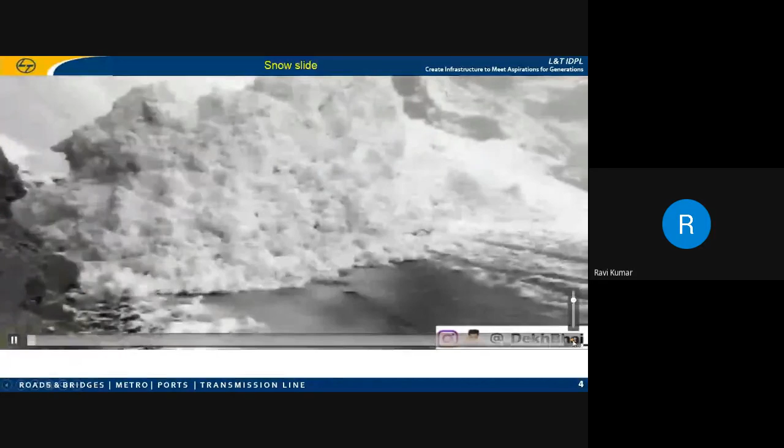My dear friends, suppose if my project corridor moves along the snowfall mountains, I have to be prepared myself. Suppose after completing your graduation, if you are given an opportunity as a site in-charge of a highway which passes through the snowfall mountains, you should be in a position to overcome these disasters. This is related to a natural disaster, snowfall slide.

So you have to prepare yourself, you have to plan in a year what will be the duration of heavy snowfall, medium snowfall, and very low snowfall where there will not be any snowfall. That calendar has to be prepared, and you have to get in touch with the National Disaster Management Office or the nearby climatic government offices and get clear data on, in the present calendar year, what may be the expected maximum snowfall.

Accordingly you have to prepare yourself and keep your team ready, whether the disaster quantum may be small or big. That doesn't matter, your preparation is the matter. So you have to well prepare yourself. Your team has to be well prepared, ready, and mobilized. When such type of things happen, immediately your team has to be mobilized and clear all the snowfall sliding and make the road open for vehicle movement. There should not be any break point.

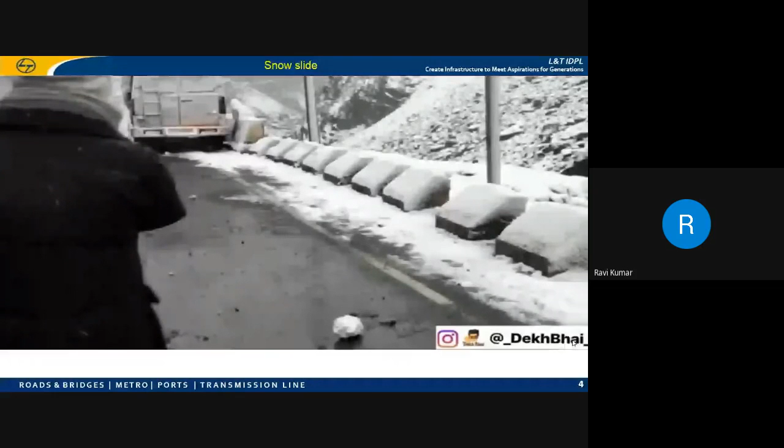If a situation arises where the natural disaster like snow slide or rockfall is very severe, taking more quantum of time for clearing the debris, in such a situation you should also find alternative routes where you can divert the traffic, so that there is always a continuity of movement of vehicles from one place to another, carrying food materials related to hospital products, medicines. Therefore, the project highway should always be in a functional situation. That is a major target.

Suppose if my project corridor is undergoing a period of 100 years, such a heavy quantum of rainfall hasn't taken place. For example, 2 days back you might have seen in the news that Hyderabad is receiving a huge quantum of rainfall, 20 centimeters overnight, where there is heavy flood everywhere, the vehicles are being washed away in the flood, the people are being washed away in the flood, the buildings have collapsed because of the heavy quantum of rainfall.

My dear friends, you have to prepare yourself. There cannot be any reason to come out that this project corridor is closed because of this problem, that it will take 2 days, 3 days, 4 days time to reopen. That situation should never occur.

We are having presently 15 highway projects spread across India, where every location will undergo, in a particular year, the overtopping of highway, heavy water flow in the rivers, landslide, rockfall, everything will happen. But we have our own protocols, our own formats, a separate team under the leadership of the project manager of the respective projects. They will lead the team. We have a separate operation manager, separate maintenance manager, separate manager who will take care of this type of disasters.

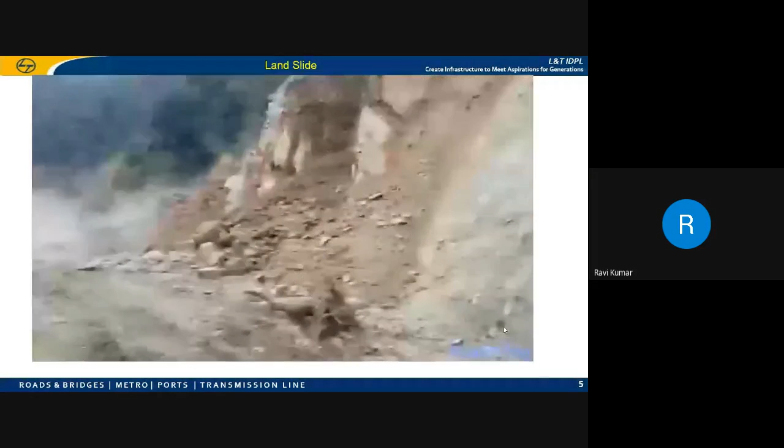You might have all seen in the newspapers or news channels about landsliding. First of all, we have to understand what is landslide. Landslide, or you can call it mudslide, refers to the downward movement of rocks, soil, mud, and organic debris. Areas with a steep slope, for example mountainous regions, are particularly susceptible to landslide hazards.

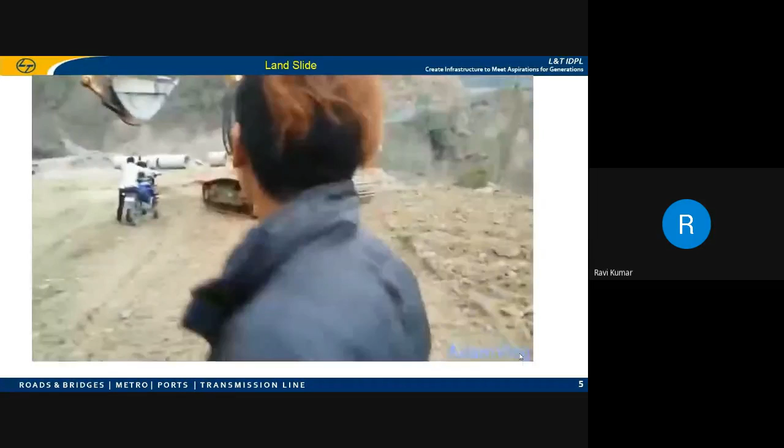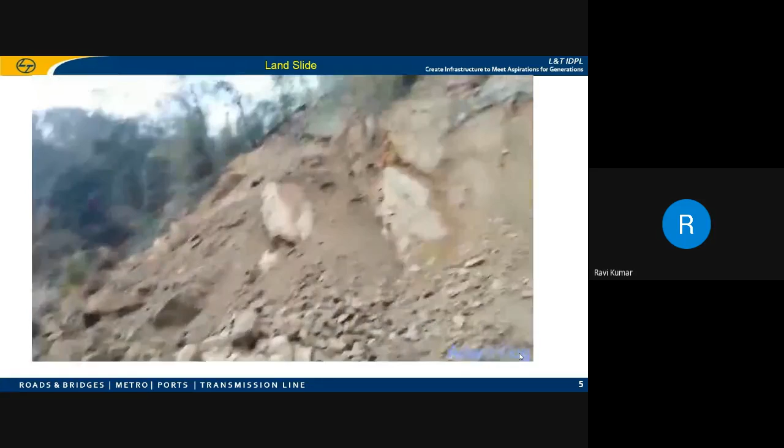Water can trigger landslides and mudslides because it alters the pressure within the slope, which leads to slope instability. Other factors that weaken slope materials also contribute to the occurrence of landslide. These factors include both natural events such as geological weathering and erosion, and also human related activities such as deforestation and changes made to the flow of groundwater.

Landslides are classified according to the type of material that falls and how that material moved downslope. For example, there are rockfall, mudslides, and debris flow.

So now we have seen what is disaster, what is mitigation. We have seen snowfall, sliding, landsliding. Now we have understood what is landsliding, how it will occur. Now we will see what is disaster management.

Now we will see another video showing rockfall sliding, which you might have also seen in the news.

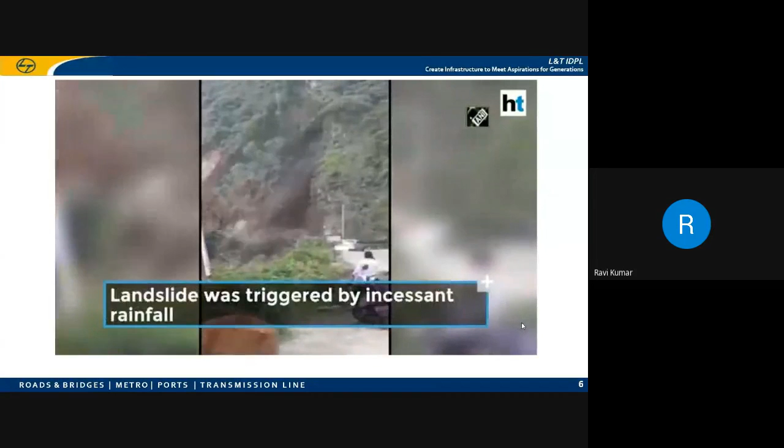As I said, incessant rainfall, heavy rainfall. So water is the greatest enemy in causing the landsliding or rockfall sliding.

So my dear friends, now we will see what is the objective of disaster management plan. And before seeing it, I just want to explain what is disaster management. Probably nowadays, disaster management becomes a part of a curriculum either in the undergraduate or in the postgraduate.

So disaster management does not avert or eliminate the threats. Instead, it focuses on creating plans to decrease the effect of disaster. Failure to create a plan could lead to damage to assets, human mortality, and lost revenue.

Events covered by disaster management include acts of human caused disaster like electrical fire, structural issues, industrial sabotage, and natural disasters like earthquake, tsunami, flood, hurricanes, etc.

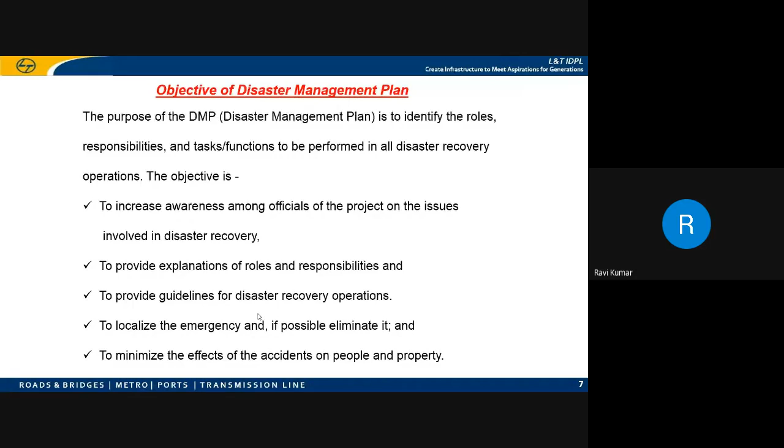So elimination will require prompt action by operators and works emergency staff using, for example, firefighting equipment, emergency due to collision and submergence, etc. Minimizing the effects may include rescue, first aid, evacuation, rehabilitation, giving information promptly to people living nearby.

My dear friends, all this whatever we are discussing today is available in the books in your library. Go and search the library related to this disaster management and mitigation plan. More and more methods, latest techniques, mitigation plans, everything are well defined with pictorial representation. Go spend more time in this pandemic period, spend more time in e-books.

Go get a membership in e-library, keep on reading more books, keep on revising your previous subjects, create a group among your friends and discuss technical points, share your understanding with your friends and ask your friend to share his understanding, and collaborate on all these things. Discuss with your faculty members, get a clear understanding of why for, what for, how for, when for. In civil engineering, if you are able to find a solution for all these questions, my dear friends, then you can easily move forward. You can keep moving irrespective of any situation that comes in your life.

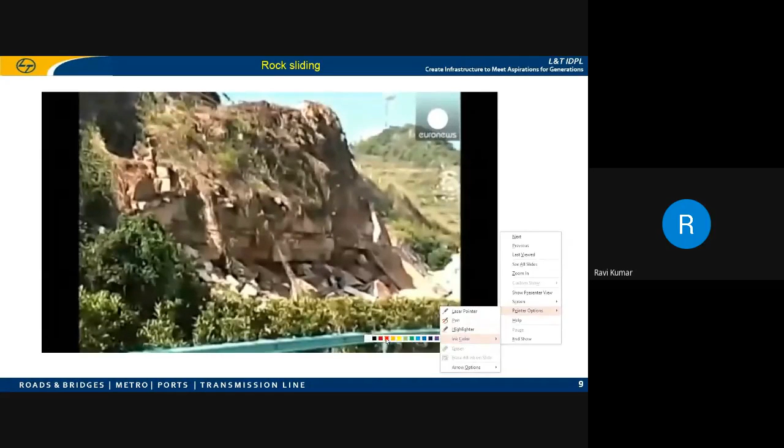You can see there is a huge rock mass here. At the bottom, a metal beam crash barrier. This is the metal beam crash barrier, and now you are having a lateral clearance. But this huge land mass is going to slide down. That is rock sliding. Let's see how it is happening.

Watch closely. So the rock mass hits over the metal beam crash barrier. That is a barrier protecting the vehicles. You see how much quantum of rock mass falls over the highway. You see a big mass is falling.

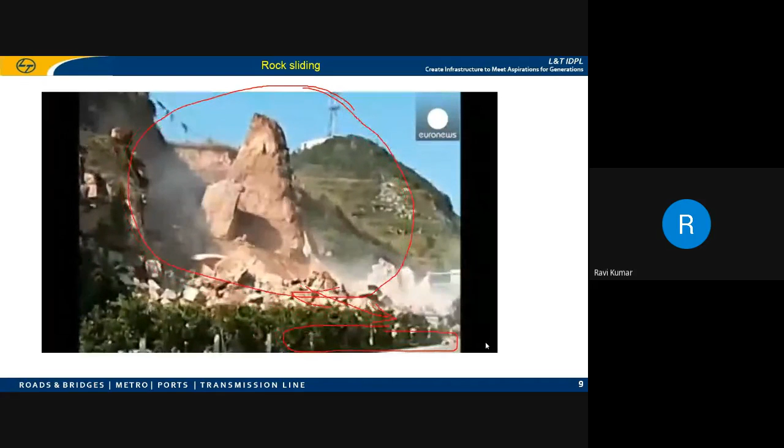Now we will see another video related to earthquake, natural disaster.

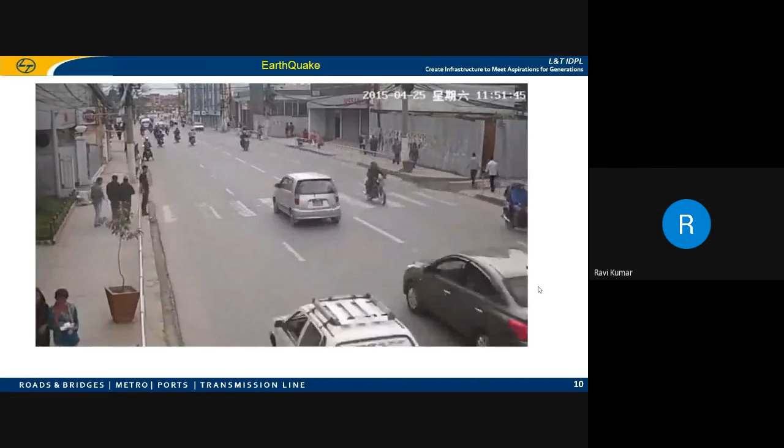See now what is going to happen. See now every vehicle is slowing down. People are crossing. See, by using mobile phone, they are used to cross. Even in our day-to-day life, we are able to see this even today. That should be avoided. Your safety is in your hand.

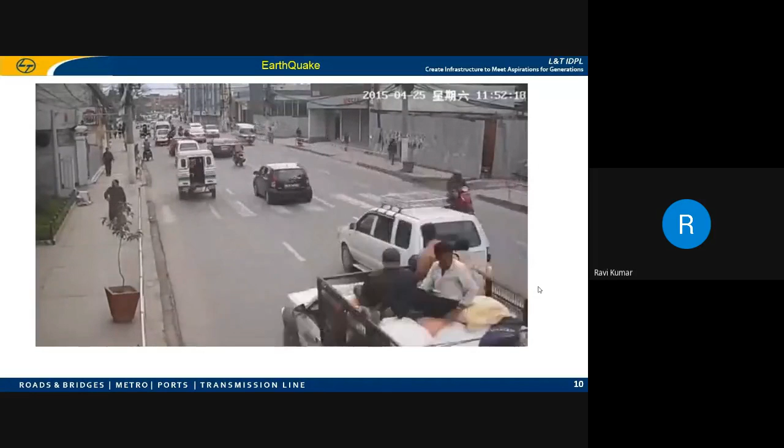See now, see the plant. And see everybody, see the lateral movement, how the trees are shaking, the plants. See the Omni van, how it is shaking.

So now because of this lateral ground movement, there may be some disturbances to the highways in the form of crack development in the longitudinal direction, that is parallel to the traffic movement. There may be impact towards the structures. That is why when you are involved in the design of highway structures, you have to understand the environmental condition, whether it is moderate, severe, or very severe, extreme. Then what type of earthquake zone it is, seismic zone 2, 3, 4, 5, and what is the maximum wind velocity at that particular location.

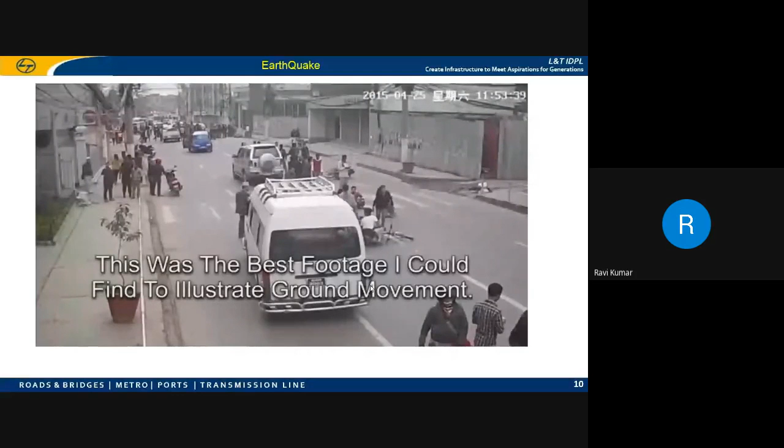Now let's see another video in understanding soil erosion.

Sir, the video audio is audible, sir.

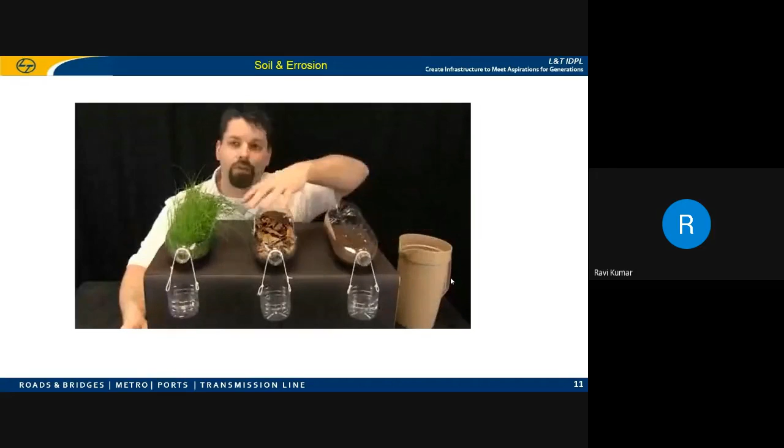Now when the water is poured over it, you will understand the erosion. This is a typical explanation with reference to how the erosion will take place.

So when you pour water in each bottle at the top, it will wash the soil. Since the water keeps moving from top to down, it will carry the soil particles along with it. It will wash away.

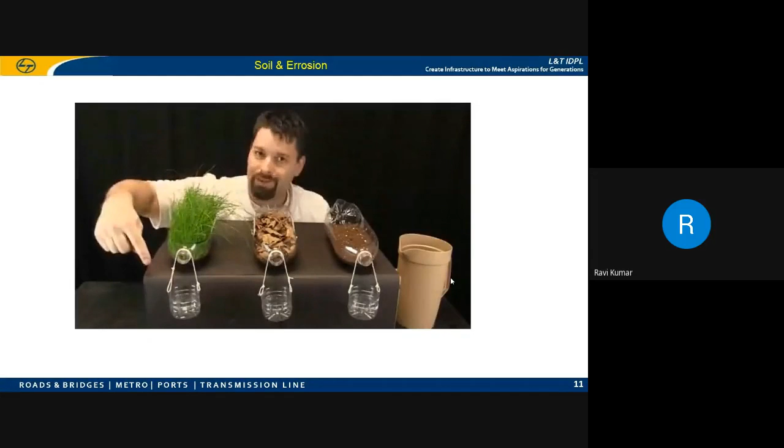Now in the second case, if the same quantum of water is poured, we will see the difference between the first bottle without anything, the second bottle with the dry leaf, and the third bottle with grass growth or vegetation growth. You see?

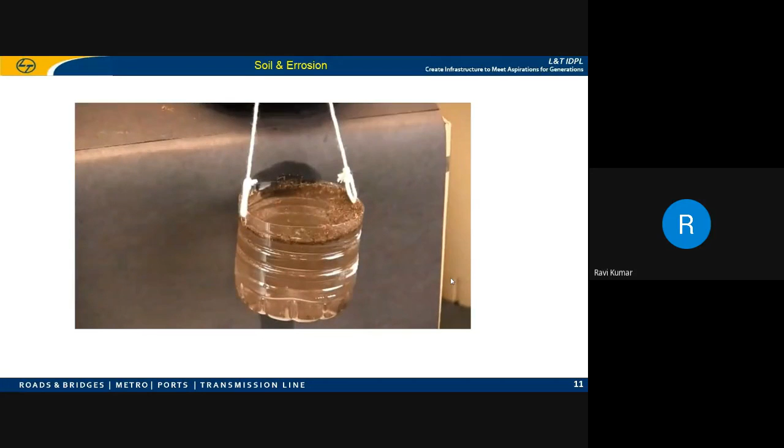You can see the soil particles or dust particles are washed away and deposited into the collective container. So in this way, the scour or erosion will take place in water bodies where your structure is located.

So now you have to protect your structure against soil erosion. That is why whenever you are involved in the design of structures across water bodies, the river bed, 5 meters in the downstream and 3 meters in the upstream, will be protected by means of floor protection work, that is bed protection. The river bed will be protected using rigid aprons and flexible aprons.

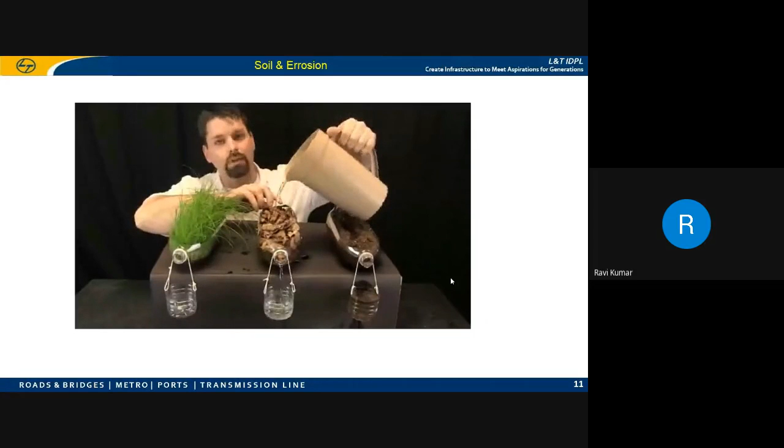Now water is being poured onto the second container, where dry leaves have been put. Now you are able to see the difference between the first with only dry soil and the second with the dry leaf. You can see the quantum of dust eroded from the container is very less compared to the first one.

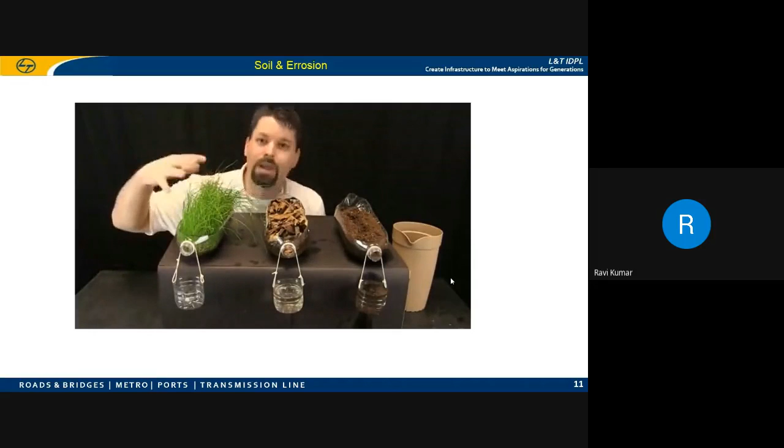So these dead leaves or dry leaves kept over the soil are acting like a barrier that protects the soil underneath from washing away along with the water flow.

Now the third, it is something a small experimental study video. Now you see, you can see the difference. The last container, where the grass roots are there, is clean when compared to the other two.

Now, what is the difference? Which makes the difference? Let us see by zooming in what is actually happening in the soil where the vegetation is grown. You can see now he is just removing that, where the grass has grown and the soil.

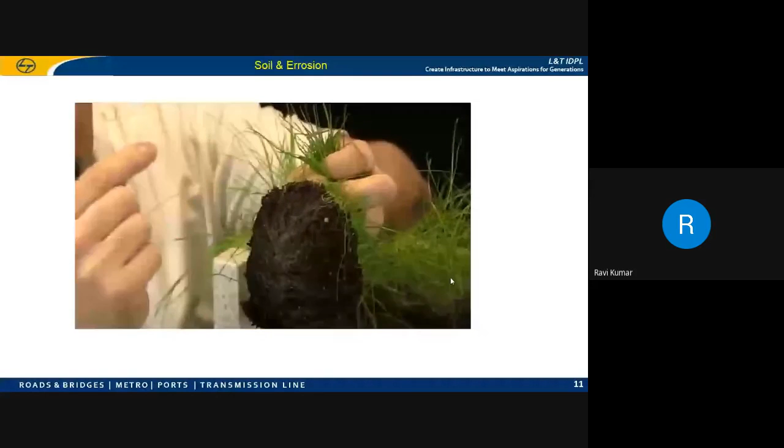So what you are able to understand from this is the roots of the grass are holding the soil underneath. It is holding firmly in such a way that when the water moves downwards, the roots of the vegetation or grass don't allow the soil particles to wash away.

You see, when he squeezes, only water is coming. So the roots are storing the water.

That's why, my dear friends, in a highway, the embankment on either side of the highway will be protected to avoid rain cut or erosion by means of stone pitching, or by means of turfing, or by means of geocells. So in that way, soil stabilization is being carried out.

Even in floor protection, due to the water flow from upstream to downstream at high velocity, the river bed nearby the structure, to avoid the scouring effect, will be protected with floor protection. So all these protective measures are not going to stop the water flow. All these measures are done to protect from failure or to reduce the impact, so that the highway structure or highway will always be operational irrespective of any disaster happening.

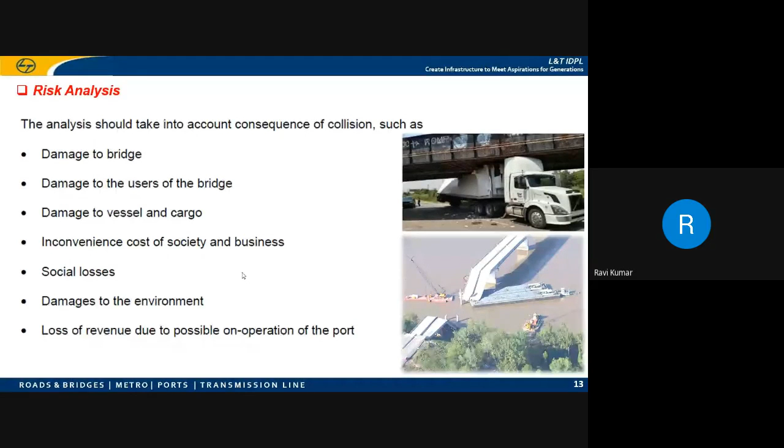So there are 5 steps in creating a risk mitigation plan. One is to identify the risk. Second, perform a risk assessment. Prioritize, track risk. Then finally implement and monitor the progress.

My responsibility doesn't get over only by identifying the risk, or by performing a risk assessment, or by prioritizing it, or by tracking the risk. My responsibility continues in implementing and doesn't stop. Not only that, my responsibility doesn't get over after implementation. Then only my more responsibility starts, and that is to monitor the progress.

Whatever the remedial measures or mitigation plan that I put into force at the site, the performance decides how the methodology is working in minimizing the impact. So how can it be achieved?

It can be achieved by continuous monitoring. Through continuous monitoring, you can easily understand what are all the negatives and what are all the positives, and it also helps you to work more to remove all the negatives one by one, slowly converting the negatives into positives, benefiting in managing the disasters.

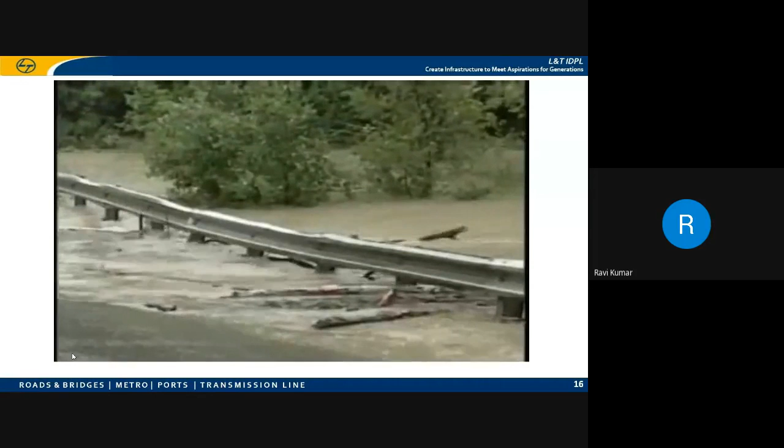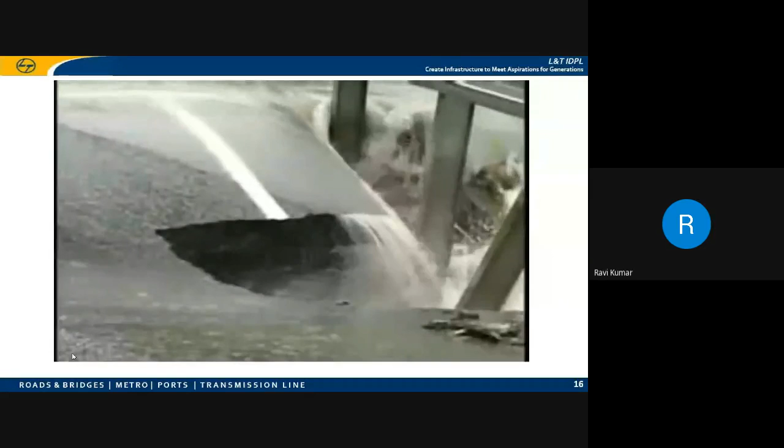See what happens at that end. See, suddenly it sinks due to erosion. Now water keeps on going down at higher speed. You see at the center what happens. Because of this heavy water flow, upward pressure develops below the highway, because there is a vent for the water flow from upstream to downstream. There is a culvert, a pipe culvert. Now you see what happens to that pipe culvert.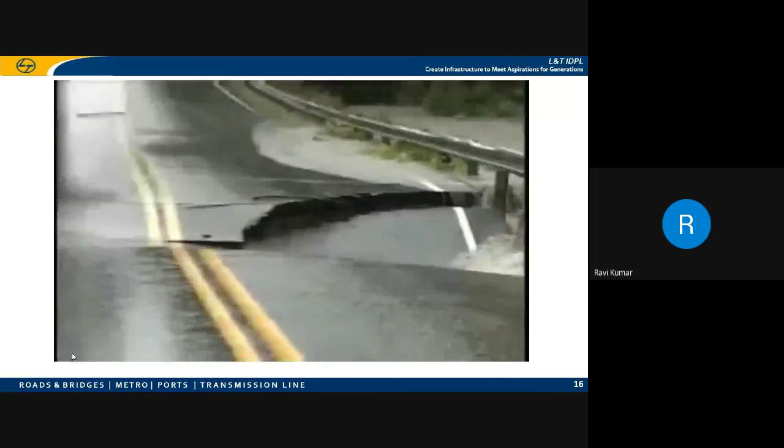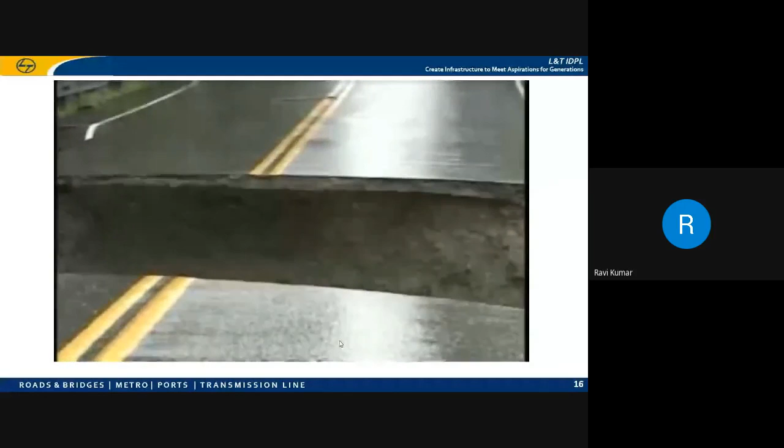See, slowly it is eroding. You see the bituminous concrete is getting sunk slowly. You see at the center, now you see, slowly it is eroding and it is totally sunk. You see, the pipe which is provided for carrying the water from upstream to downstream is now finally floating upwards. So this type of damage may also occur due to heavy rainfall, a natural disaster.

So in such a situation, how can we be well prepared to overcome this, so that the damages are minimized?

So now you have to prepare yourself to overcome all these impacts. Now the next slide, you see the collision which we have discussed earlier. So what happened? The truck comes and gets collided with the structure, and now this damage is very severe.

Now suppose if this bridge gets closed to carry out this repairing job, then a stoppage of vehicles is required, which will have a huge impact over the commodities movement or health products movement. Therefore, you should always prepare yourself to overcome or minimize the impacts. Whether you expect it or not, that cannot be a reason for the stoppage of vehicles on a highway when the disaster happens. Okay, my dear friends?

Now we will see another video related to this collision, truck collision.

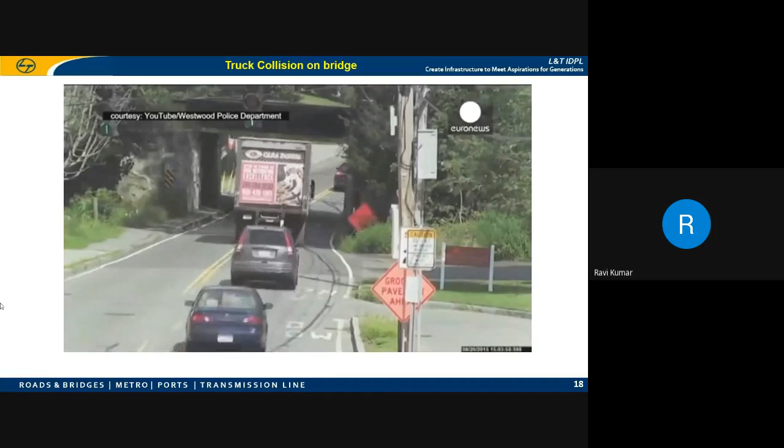You see? So this may also occur. We cannot say the reason is the fault of the truck and that I have to close the highway.

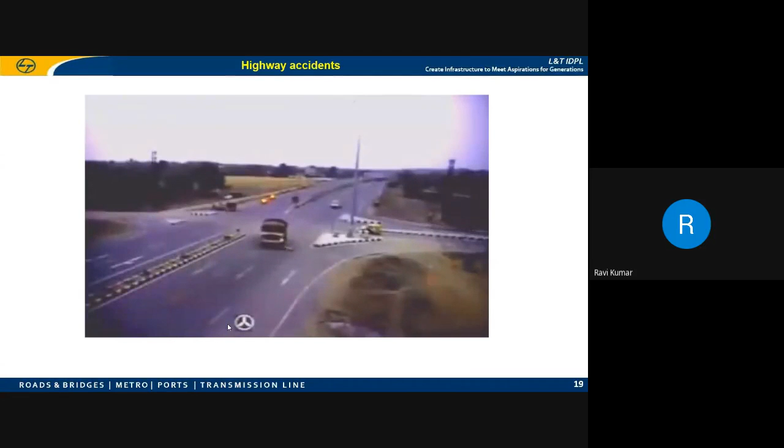Now we will move on to the next. You see the accidents. My dear friends, the highway is not a place to show off or to thrill yourself. The highway is a place where you are provided the movement to move safely. Your safety is in your hand. You have to be very cautious.

You see that two-wheeler? See whose fault it is. Just once again, I'm rewinding it. You see, this is one lane, first, second, and third. The car is coming in this third lane. Okay, now this is the two-wheeler.

What he has to actually do, as a two-wheeler, when crossing this highway junction, is see both left and right for any vehicles, because the vehicle may come across at more than 80-100 kilometers per hour. So as a two-wheeler, you have to be very cautious because this is through traffic moving. So on both the left hand side and right hand side, the through traffic will move fast. Therefore, the cross traffic has to wait and see, because this is in a curvature.

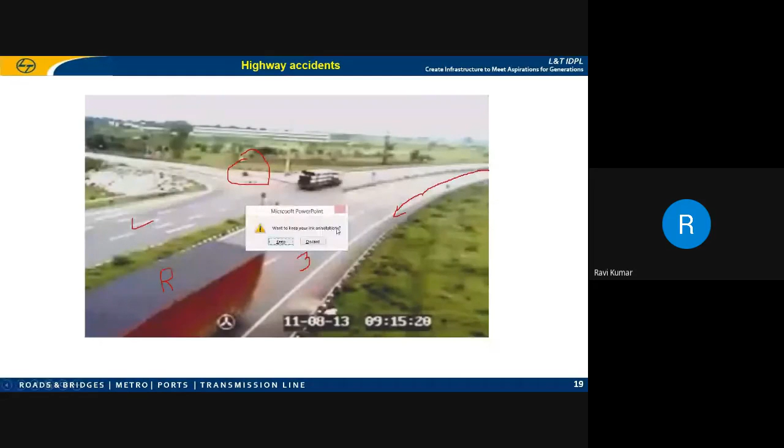You see all the vehicles are coming. Have you noted that action? This two-wheeler is coming under the crossroad without seeing that on the right hand side a vehicle is coming, and he is taking a turn going up to the third lane.

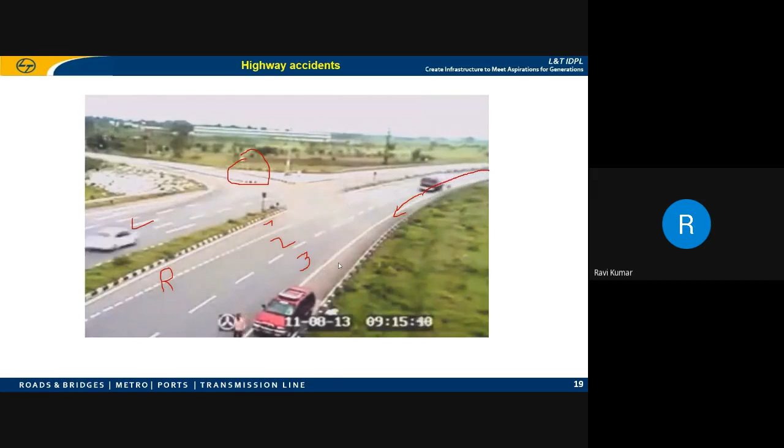You should never take risk when you are riding vehicles on a highway. You see, now the same two-wheeler, when he is crossing the junction, that is the fast moving vehicle location.

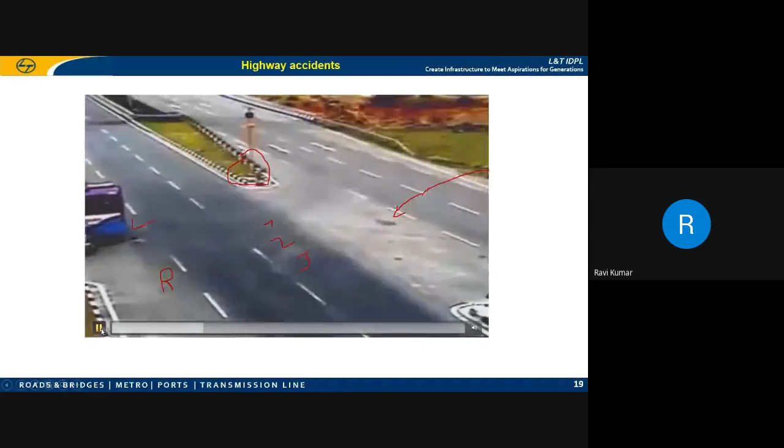See, when the bus is standing, the people who are coming out of the bus have to see whether any vehicle is coming from behind. Without seeing anything, they just keep crossing. After getting down from the bus, immediately, in a hurry, they will cross. Then what will happen? It will lead to accidents.

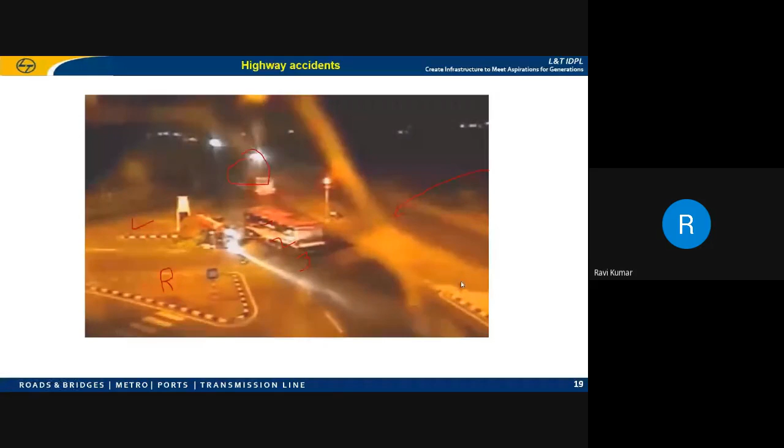Fine, now we'll move on to the next slide. My dear friends, we have discussed more about the various disasters and everything. Now, how can we avoid this? How are we managing it? We are managing it through various types of inspection.

One is routine inspection, periodical inspection, pre-monsoon inspection, post-monsoon inspection, detailed inspection. With these various kinds of inspection, we are able to map all the disasters and we are able to plan, prepare ourselves, and manage it so that our highway will always be functional irrespective of any type of disaster that occurs.

So we have Bridge Management System Inspection, BMS. A system is there. This slide will describe the BMS process flow: collection of inventory data, periodic inspection, assessment of condition and strength, prioritizing allocation of funds, repair, strengthening and replacement, then safety.

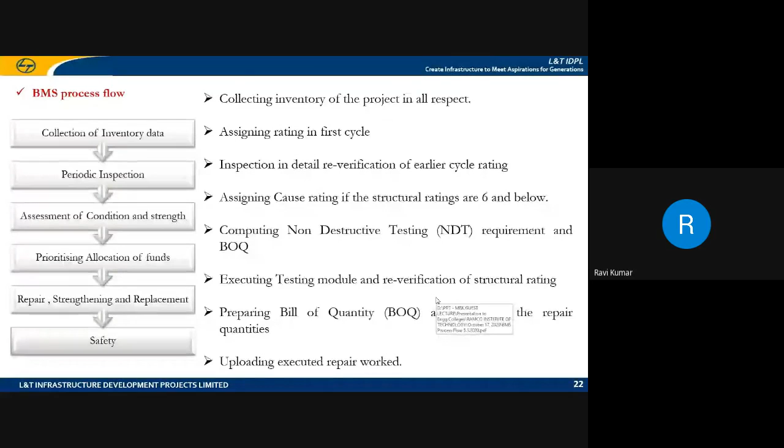My dear friends, it is very, very essential. Safety of vehicle users is the topmost priority in our project corridors. Now we have a checklist or a format to map all the deteriorations or destruction or disaster or distresses.

Everything will be mapped, whether it is a concrete member or a steel member, whether it is RCC or PSC, whether it is a bridge or a highway, whether it is a flyover or a river bridge. According to the type of structure, according to the type of material, everything will be described in the checklist and everything will be mapped.

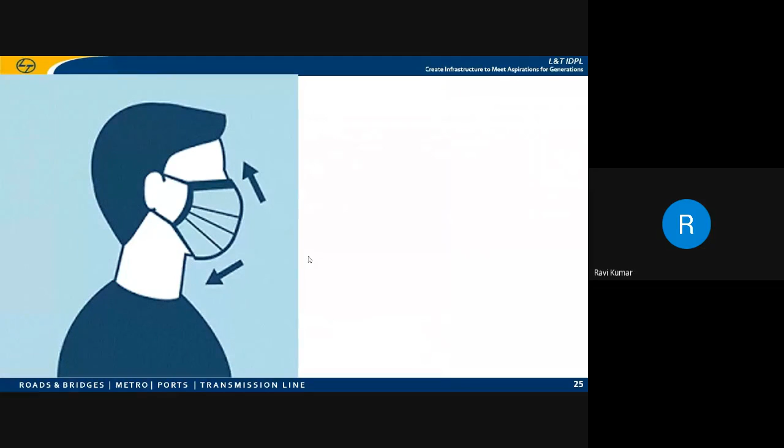My dear friends, in the present situation, we have been asked to wear a mask covering the two entry points - one is the nostril and mouth - to protect ourselves from the entry of microorganisms.

Same way, it is very essential to provide an adequate number of cover blocks at adequate locations, because the cover is a barrier which protects the structural steel as well as structural concrete from the environmental effect, from corrosion, from any sort of deterioration or distress. So cover concrete, even though it is not structural concrete, plays a vital role in protecting your structural concrete and structural steel.

Suppose I am wearing a mask - if you are wearing a mask but one of the entry points is open, then there is no use. Same way, you can tell I have used a cover block, but have you used an adequate number at adequate locations? That is very important.

Wherever there is a laxness in the cover, that portion will easily get affected by environmental factors and other factors. Then corrosion will start. When the bars are corroded, the volume of steel increases 5 times, and when the volume increases, because of the tension that develops along the length of the bar, a crack may develop along the length of the bar.

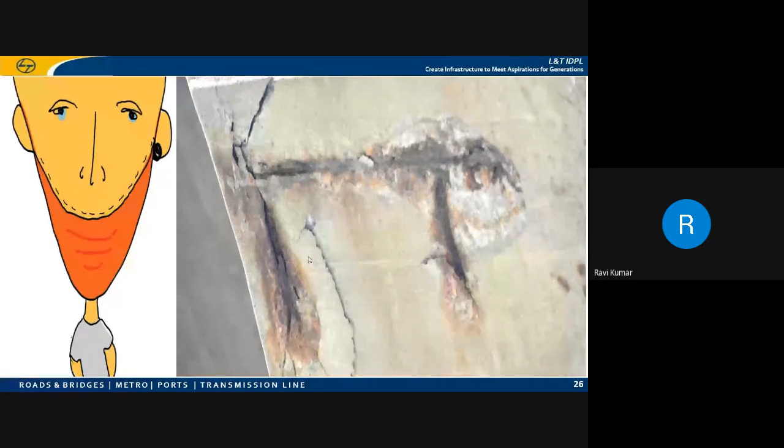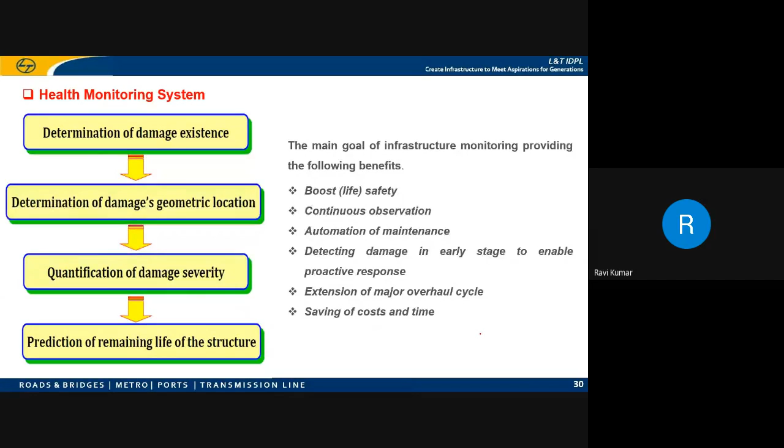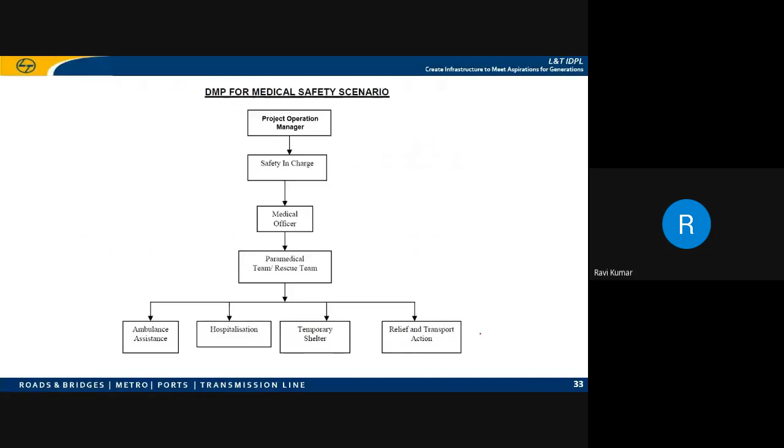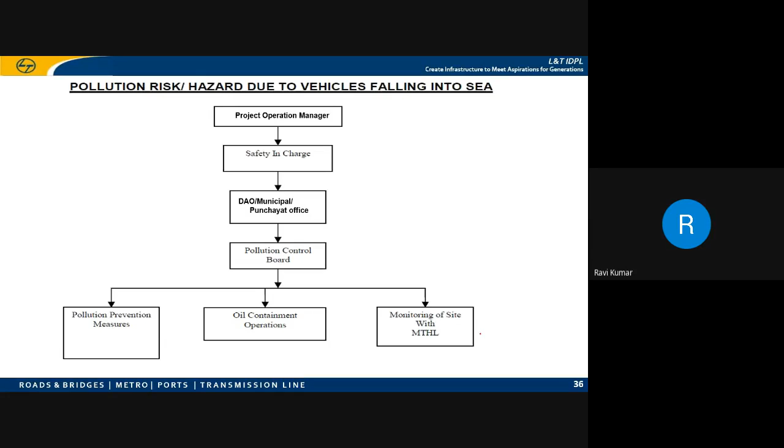Now we call it a bridge concept: understanding the disaster risk, communicating the disaster risk, and managing the disaster risk.

That's why in our project we have an SOS system, where suppose if vehicle users are having some problem, immediately with the help of SOS there will be a telephone on the sides of the highway. When they pick it, automatically it will be attended by the project office operation team. There will be a separate team who will attend this call, and after hearing the problem, immediately it will be attended.

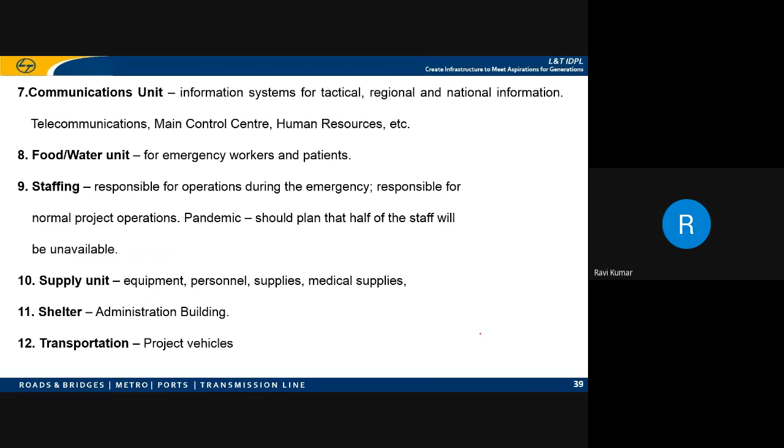Our project highways are monitored with a surveillance system through and through, from starting chainage to ending chainage, both left hand side and right hand side carriageway. It will be completely monitored using the surveillance system, so our operation office can monitor the entire length of the project corridor, irrespective of whether the length is 6 kilometers or 300 kilometers. Each and every section of the entire length will be under monitoring, so that if any problem occurs, it will immediately be attended by our operation team as per the SOPs, so that the project highway will always be functional.

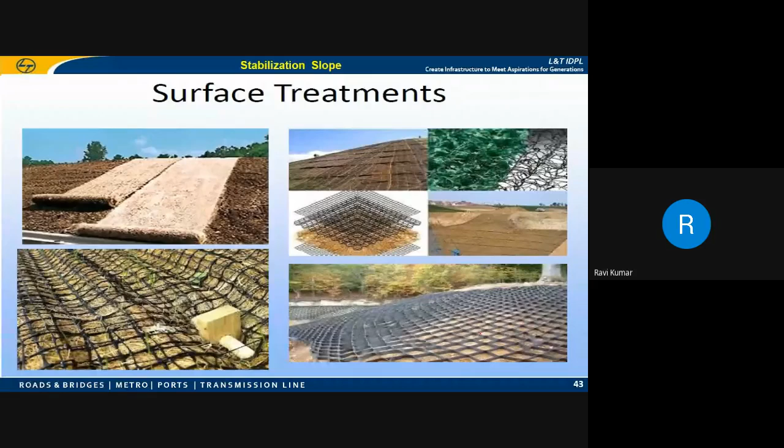This slide describes surface treatment using geomat, jute mat, geogrids, geocells. Stone pitching is another method, and slope stabilization using geocells, geogrids, jute, with vegetation growth is another method.

Another method is soil nailing. Soil nailing is a procedure to reinforce and strengthen ground adjacent to an excavation by installing closely spaced steel bars called nails as construction proceeds from top down.

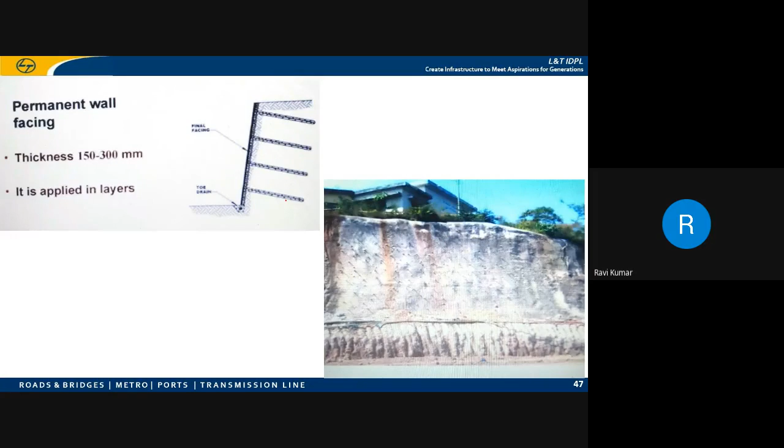You can see a small video related to soil nailing.

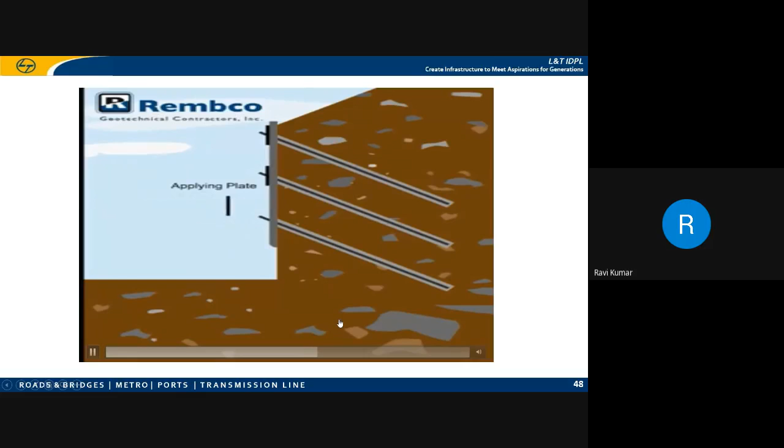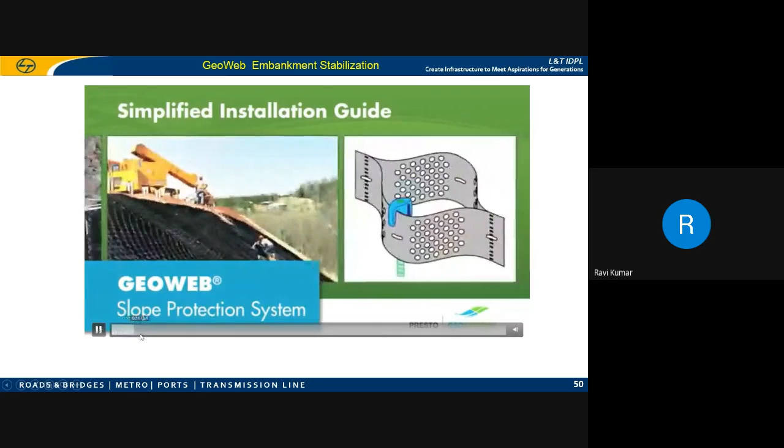We will see the method of GeoWeb in embankment stabilization. This is another method. It will be a step-by-step video, you can kindly watch.

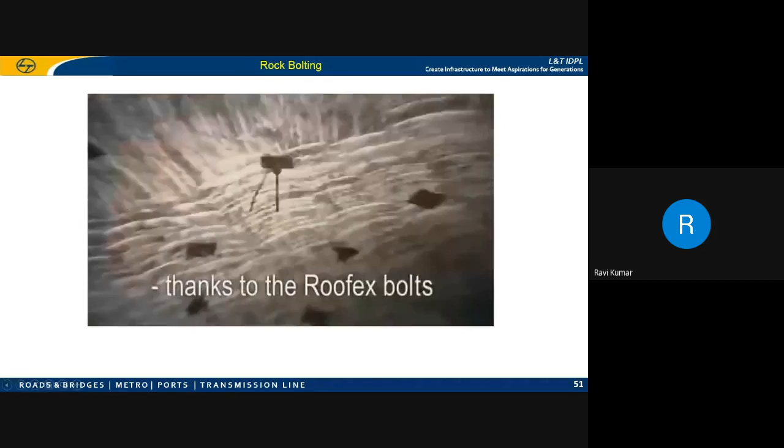Friends, why am I sharing more videos with reference to various methodologies? At this stage, if you understand, when you get an opportunity to work under this type of situation, it will be easy for you to handle and move forward.

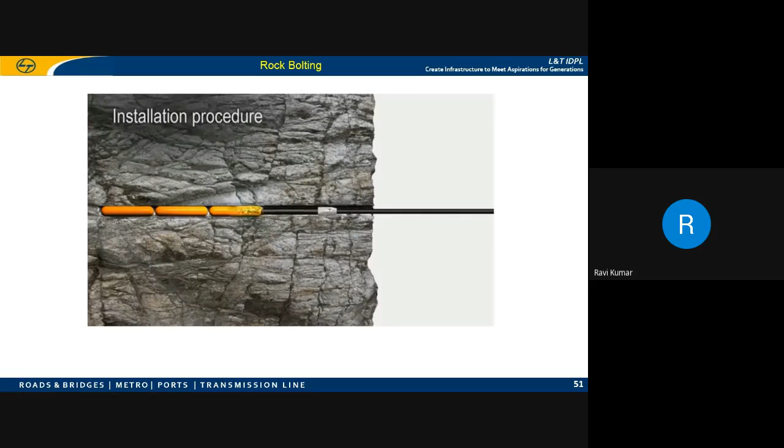Now we will see the installation procedure. This is grouting. The grout comes in the form of tablets. First it is put in, and through that the rock bolting or rock nailing is inserted. Then finally it is tightened at the outside.

My dear friends, you have to understand the goal of rock support in such condition is to absorb the kinetic energy of the ejected rock. Energy absorbing rock bolts should be used. That's what you are seeing now. The energy of the rock that is getting dissipated or ejected is absorbed by the rock bolts. The higher the load bearing capacity of the energy absorbing rock bolt, the less the ejected rock displaces.

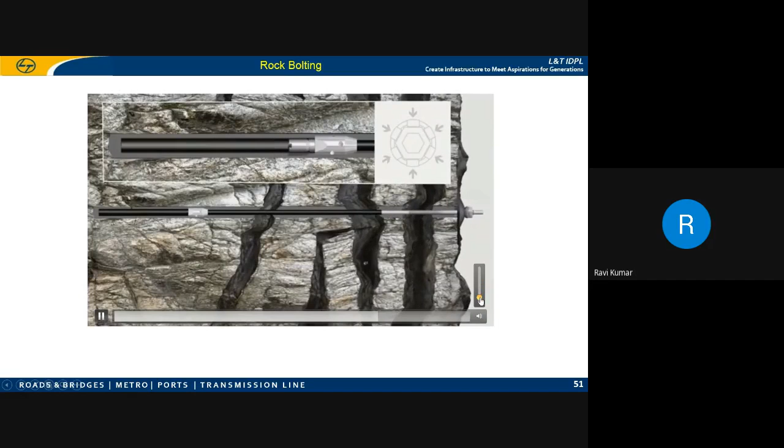You can monitor the rock mass movement. So in this way, this is another methodology in protecting against rock fall or rock sliding.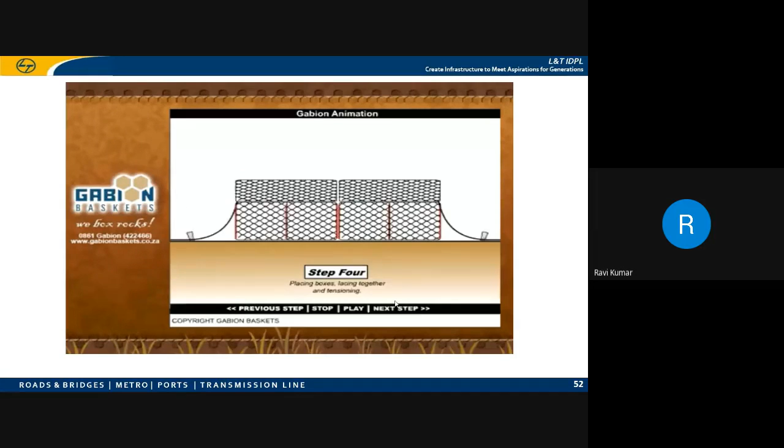That is tying together. Step 5, you have to fill it with suitable rocks. Step 6, brace the basket. Step 7, fill the box, repeating steps 5 to 6.

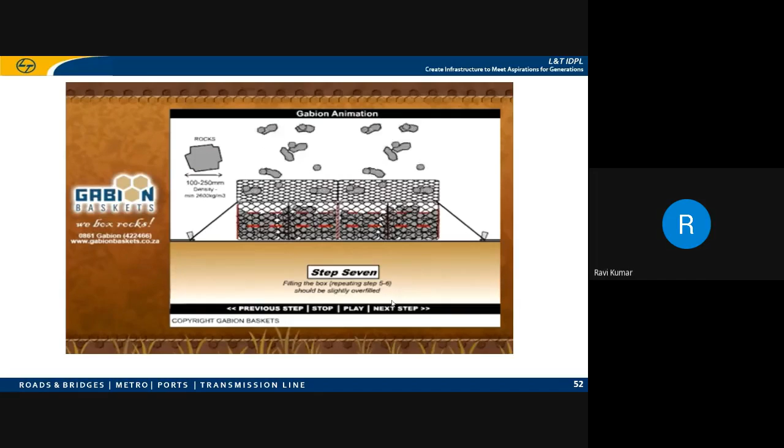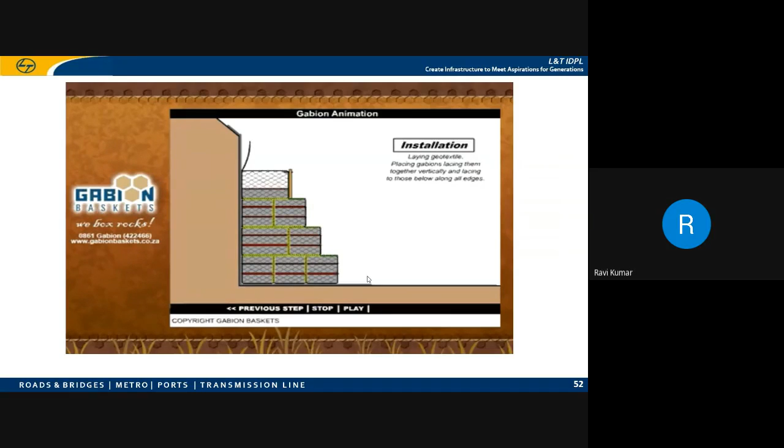Step 8, close the net. Step 9, lacing. Before installing the baskets, you have to prepare the surface. Now place the basket in the installation area.

So we have come to the final slide, my dear friends. I tried myself, within this short period, to cover the various disasters, natural and man-made, what are the various types of disasters, how the impact will be, and what are the SOPs that we follow to minimize the impact of these disasters.